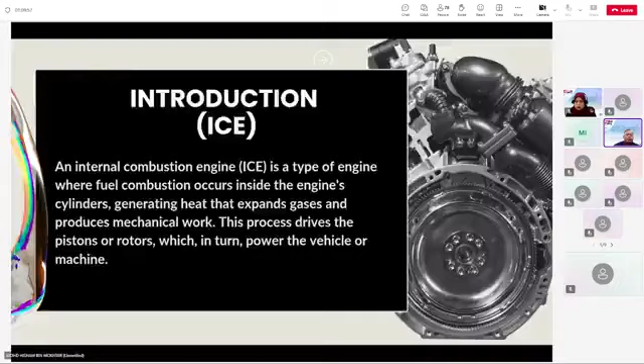What we are looking at today, as content: first, an introduction to internal combustion engine. Third, homogeneous charge compression ignition, HCCI. Fourth, reactivity controlled compression ignition, RCCI. Number 5 should be a new engine, ammonia engine. Number 6, hydrogen combustion. Number 7, detonation engine.

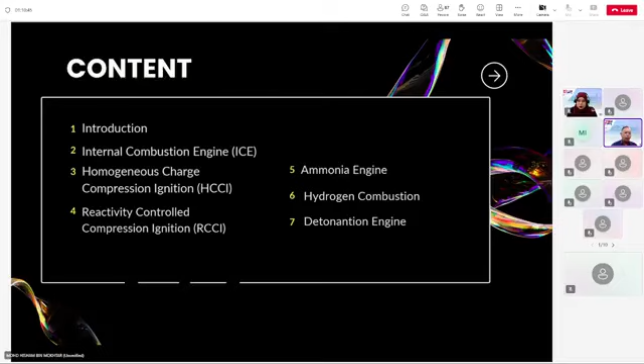I will share some new technology about internal combustion engine today, so perhaps everyone can understand. Maybe the information is good for your knowledge, for all members of technologists.

Internal combustion engine, ICE: fuel is burned inside the engine itself, typically in a chamber called the cylinder. Heat from expanding gases from combustion pushes the piston, which drives a crankshaft to produce mechanical power. ICEs are commonly found in cars, motorcycles, and aircraft.

External combustion engine - today we are not talking about the external combustion engine. Fuel is burned outside the engine and the generated heat is transferred to a working fluid such as water, which powers the engine. For example, the steam engine, where coal is burned to heat water to produce steam, which then drives the piston or turbines.

So the main engine types: gasoline engine uses spark to ignite a mixture of fuel and air. Diesel engine relies on high compression to ignite the fuel without a spark. Later I will explain about the main engine types using gasoline engine and diesel engine.

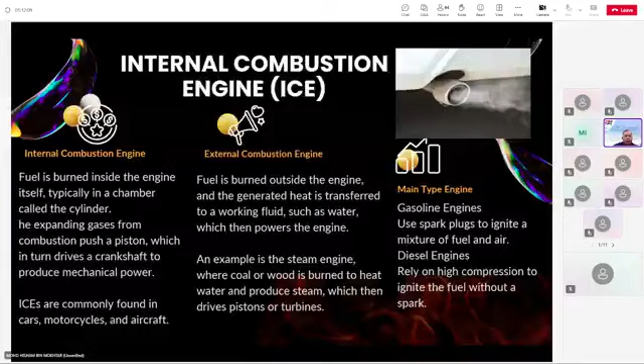Okay, first we are talking about the diesel engine. A diesel engine is a type of internal combustion engine that operates using the heat of compression to ignite the fuel, rather than using a spark plug like a gasoline engine. In the diesel engine, air is compressed to a much higher degree, raising the temperature inside the cylinder. When diesel fuel is injected into the compressed air, it ignites spontaneously, causing a controlled explosion that pushes the piston to generate power.

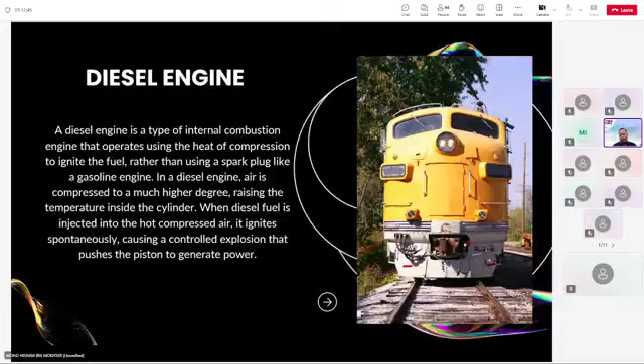Okay. Somebody knows, maybe somebody doesn't know, about why there's no spark plug. It's compression ignition. Diesel engines don't use a spark plug because compression ignition is a type of ignition. In the diesel engine, the fuel is ignited by the heat generated from compressing the air, not by a spark plug. Diesel engines operate at higher compression ratios, around 14:1 to 25:1 compared to gasoline engines, leading to high temperature and pressure.

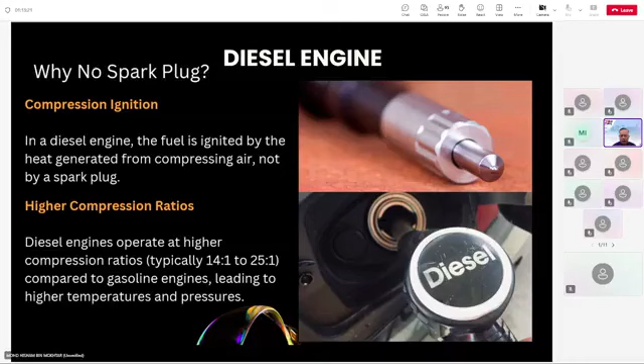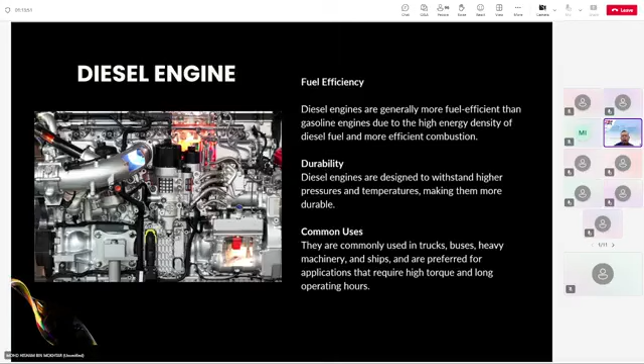Diesel engine fuel efficiency: diesel engines are generally more fuel efficient than gasoline engines due to the high energy density of diesel fuel and more efficient combustion. Durability: diesel engines are designed to withstand high pressure and temperature, making them more durable. Common use: they are commonly used in trucks, buses, heavy machinery, ships, and are preferred for applications that require high torque and long operating hours.

A diesel engine relies on compression ignition rather than a spark plug. The key difference between diesel and gasoline engines is how the air-fuel mixture ignites. In a diesel engine, air is compressed to a much higher pressure than in a gasoline engine, which raises its temperature. When diesel fuel is injected into this hot compressed air, it ignites without the need for a spark plug. Internal combustion engines are used for motorcycles, aircraft, ships, and generators due to their efficiency and versatility. However, they emit greenhouse gases, contributing to environmental concerns, leading to a growing focus on electric and hybrid technologies.

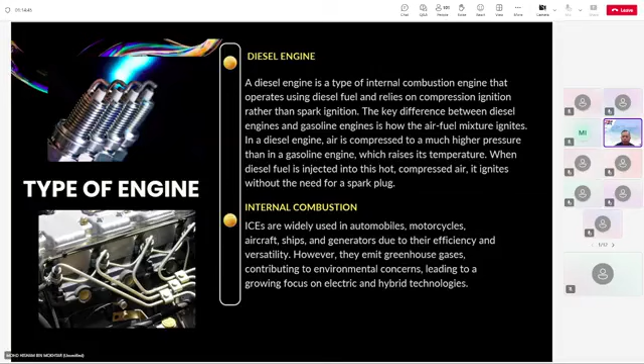Now we're looking at diesel operation. Diesel combustion is known for its high thermal efficiency and torque output, which makes diesel engines ideal for heavy-duty applications like trucks and industrial machinery. However, the process can produce more nitrogen oxide and particulate matter compared to the gasoline engine, requiring additional emission control technologies.

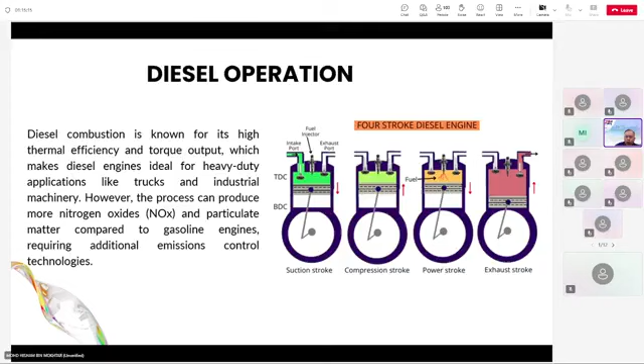This is the process. First is suction: the intake valve opens, the exhaust valve closes, and air is sucked into the cylinder. Second, compression: the inlet valve is closed, the exhaust valve is also closed, air is compressed in the combustion chamber, and diesel is injected. During this, there is high temperature and high compression as the diesel is injected.

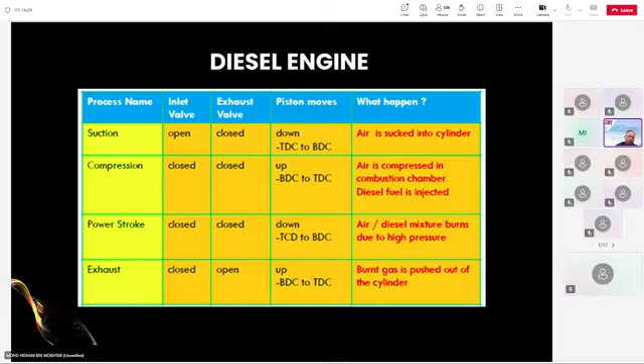Power stroke: the inlet valve is closed, the piston moves, the exhaust valve is closed, and the air-diesel mixture burns due to high pressure. Exhaust: the inlet valve is closed, the exhaust valve is open, and the burnt gas is pushed out of the cylinder. This is the normal sequence for the diesel and gasoline engine.

How about we look at the four-stroke engine operation? The four-stroke is the normal engine we use every day. Intake stroke: the piston moves down, drawing in the air-fuel mixture through the open intake valve. Compression stroke: the piston moves up, compressing the air-fuel mixture to increase its energy potential. Power stroke: the spark plug ignites the compressed mixture, causing an explosion that pushes the piston down and generates power. Exhaust stroke: the piston moves down, then up again, expelling burnt gases through the open exhaust valve. This is the normal sequence.

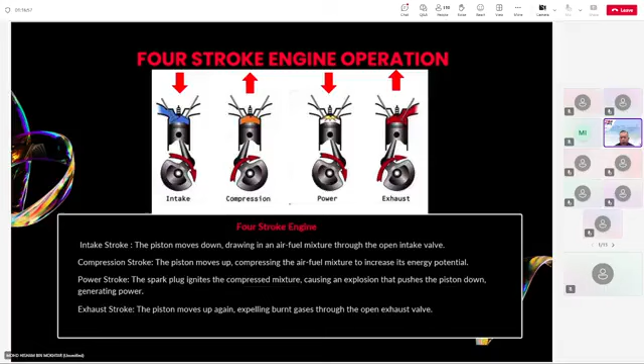How about the two-stroke engine? Two-stroke engines have high power output per displacement, a simpler design, and are better for higher RPMs. They are commonly used in small applications like motorcycles, lawn mowers, and chainsaws.

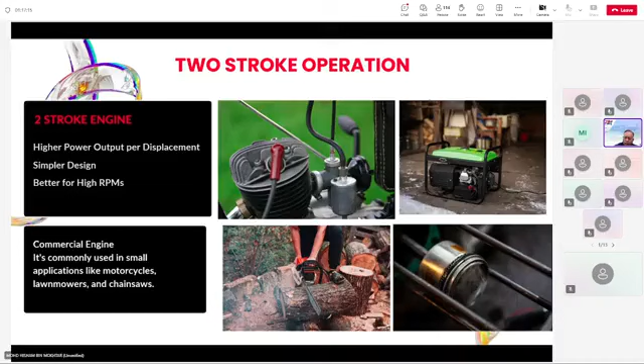For your information, in a two-stroke engine, the intake, compression, combustion, and exhaust processes occur in two movements of the piston. That means compression and power stroke together form the downstroke, which is one process. Then exhaust and intake occur during the upstroke, which is another process. The two-stroke engine is known for being simpler, lighter, and more compact, but is less fuel efficient and produces more emissions compared to the four-stroke engine.

So as we all know, the two-stroke is a small engine used in applications like motorcycles, lawn mowers, and chainsaws.

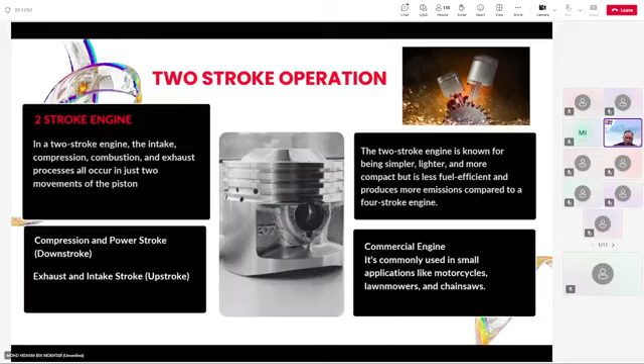Now we are starting on the potential of ICE. The potential of ICE is the new technology called homogeneous charge compression ignition, HCCI. It is an advanced type of internal combustion engine that combines elements of both spark ignition, used in gasoline engines, and compression ignition, used in diesel engines. HCCI engines achieve combustion by compressing a homogeneous air-fuel mixture to the point where it ignites spontaneously due to high pressure and temperature, eliminating the need for a spark plug and direct fuel injection timing for ignition.

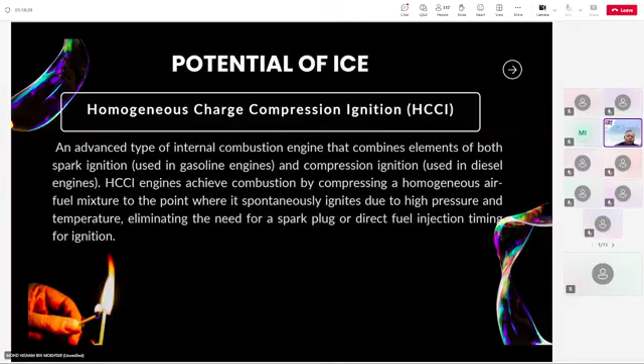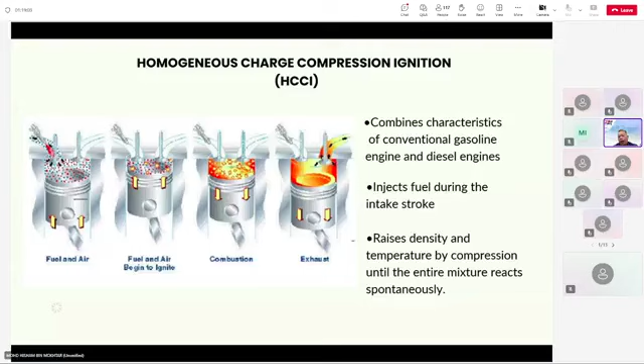This is HCCI. HCCI means homogeneous charge compression ignition. First, it combines characteristics of the conventional gasoline engine and the diesel engine. Fuel is injected during the intake stroke, and compression raises the density and temperature until the entire mixture reacts spontaneously.

For your information, HCCI has gasoline-engine-like emissions combined with diesel-engine-like efficiency, achieving 50 to 60% combustion efficiency. Compression raises density and temperature until the entire mixture reacts spontaneously.

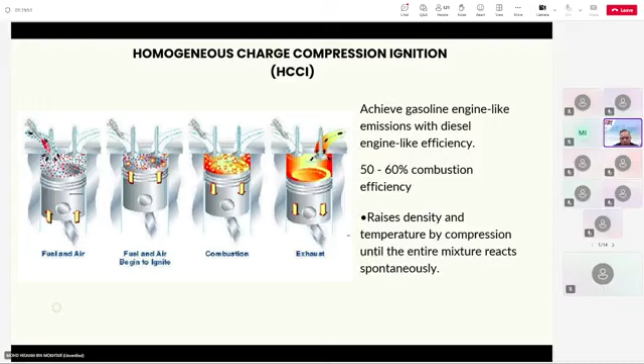For your information, the fuel and air were mixed before entering the combustion chamber. The fuel and air mixture begins to ignite and be compressed. Then combustion happens at the combustion stroke, followed by the exhaust stroke. After that, the exhaust valve will open to let the scavengers out.

Homogeneous Charge Compression Ignition, HCCI, has some weaknesses. Auto ignition is difficult to control, it has a small torque range, and is constrained at low loads due to lean flammability limits, and high loads are restricted by in-cylinder pressure, giving a small range of stable combustion. Because HCCI is still under development, there are weaknesses that need to be overcome to get better results for this engine.

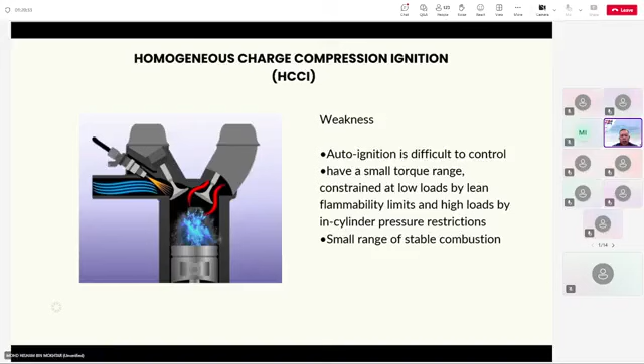Several countries and leading automotive companies are actively researching and developing the HCCI engine to improve efficiency and reduce emissions, such as USA, Japan, Sweden, South Korea, and China.

Now we are changing to RCCI, Reactivity Controlled Compression Ignition. It is an advanced combustion technology that aims to combine the benefits of traditional diesel engine efficiency and gasoline engine low emission. RCCI is a dual fuel combustion concept that strategically controls the reactivity of different fuels to achieve superior performance and cleaner combustion.

This is quite special. In RCCI, there are two types of injectors, PFI and DI. PFI means low reactivity fuel, DI means high reactivity fuel. This requires two different fuels - you must remember the cylinder requires two different fuels.

Low reactivity fuel gets injected into the intake port with low pressure during the intake stroke. High reactivity fuel is injected into the cylinder with high pressure near the end of the compression stroke. The whole fuel charge is ignited near top dead center of the piston by injecting the high reactivity fuel.

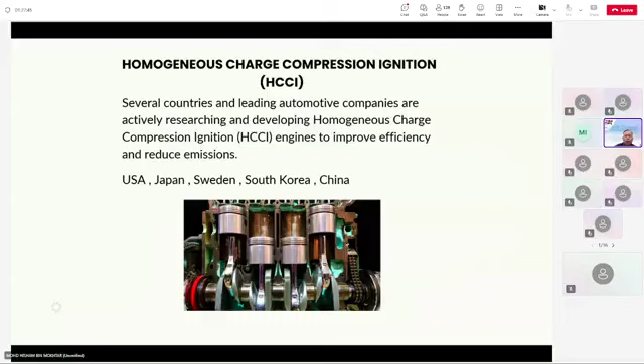Before we go to the RDE, we go back to RCCI first. I come back for RCCI because there is some process that I can explain right now. It's the advanced combustion technology aimed to combine the benefits of traditional diesel efficiency with low emission.

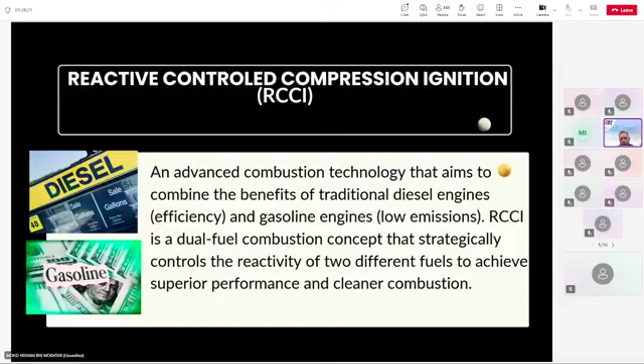RCCI is a dual fuel combustion concept that strategically controls the reactivity of two different fuels to achieve superior performance and clean combustion. That means this combustion, this explosion process needs two types of fuel. First, PFI, low fuel reactivity fuel, that requires two different fuels.

During the combustion engine, the PFI will be injected through the intake port. Then high reactivity fuel stands by to ignite, to spray during the high compression.

Low reactivity fuel gets injected into the intake port with low pressure during the intake stroke. High reactivity fuel gets injected into the cylinder with high pressure at the end of the compression stroke.

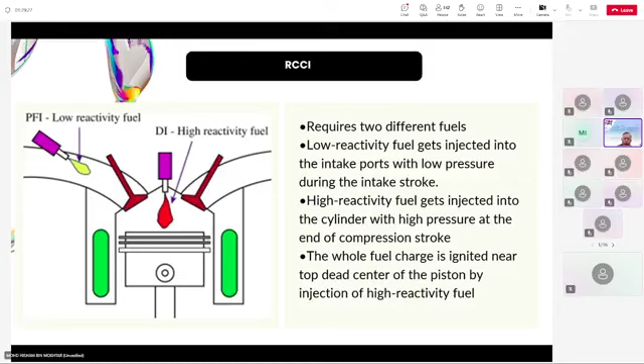That means both different fuels are used to get the explosion and the combustion. The whole fuel charge ignites near top dead center of the piston by injecting the high reactivity fuel. During high reactivity injection, the fuel is like diesel, and the PFI is usually for the gasoline engine.

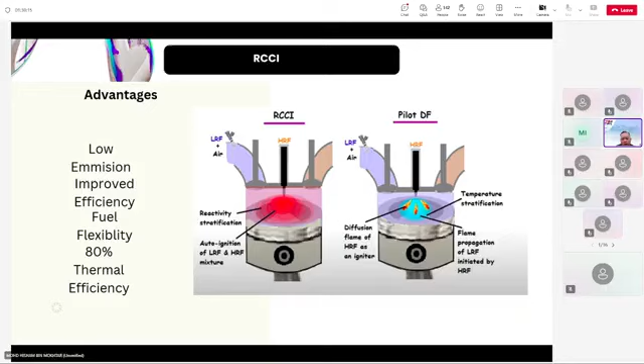That's because it's the reactive HCCI. So it's low emission, improved efficiency, fuel flexibility, 80% thermal efficiency. It's a quite unique and new design of engine.

Advantages of RCCI: low emission, reduce NOx, CO2 and soot, better combustion process control, reduced incomplete combustion, improved efficiency, and fuel flexibility.

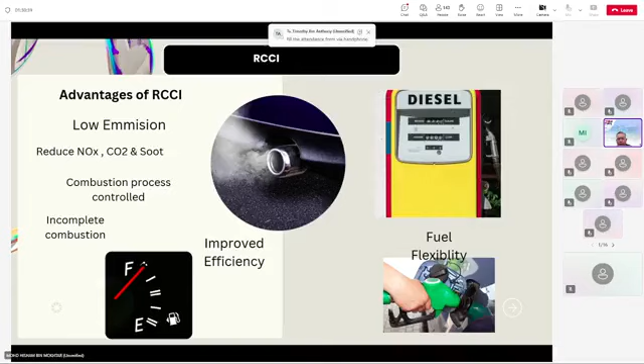As we all know, countries like the United States, Japan, and Germany, along with leading compression engine manufacturers, are actively researching RCCI technology, collaborating with universities and research labs, aiming to overcome challenges such as fuel supply systems and engine adaptability for widespread use.

So the RCCI engine represents a major innovation in internal combustion engine design, aligning with global efforts to reduce environmental impact while maintaining performance and reliability.

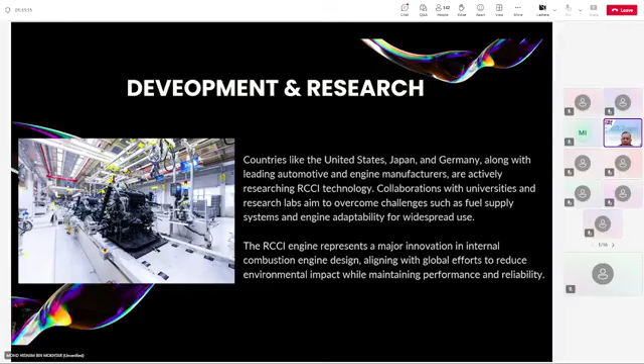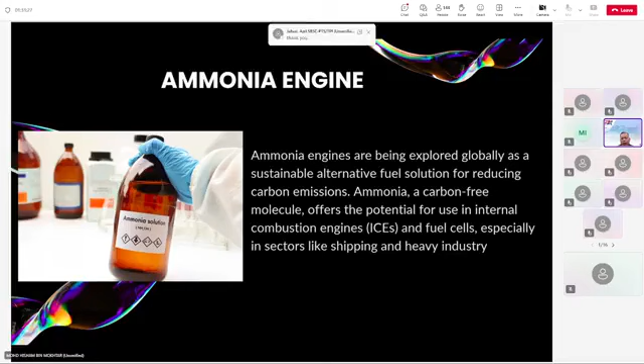Okay, just now we explained about the ammonia engine. The fuel will be changed to ammonia. The ammonia engine is carbon free. As a fuel, ammonia produces no direct carbon emission.

Energy density is higher than hydrogen, and its liquid form makes it easier to store and transport, produce and transport. Existing ammonia production and distribution networks can be adapted for energy use. It's cost effective, potentially cheaper than hydrogen as a green fuel depending on the production method.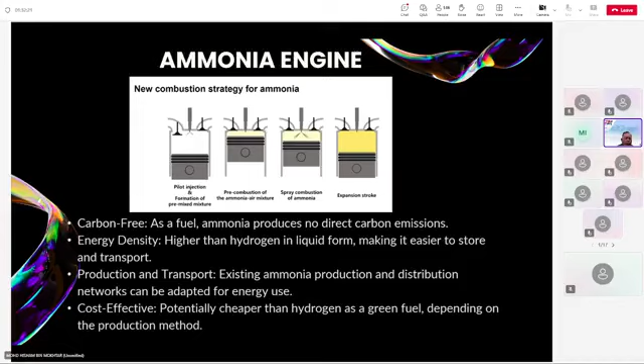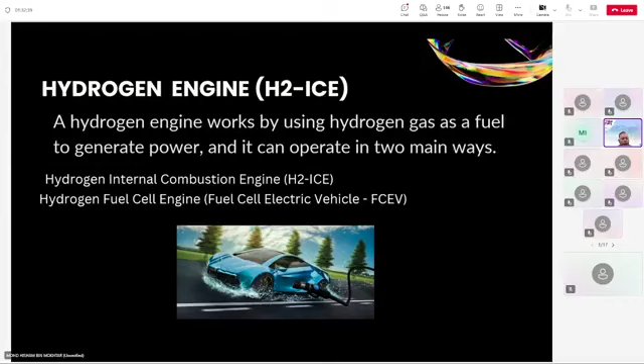So next is the hydrogen engine, which I may have explained already. The hydrogen engine works by using hydrogen gas as fuel to generate power. It can operate in two main ways: hydrogen internal combustion engine, and hydrogen fuel cell engine, fuel cell electric vehicle.

So for the hydrogen engine, hydrogen exhausted through the engine emits water vapor, and its primary emission makes it environmentally very friendly, because there is no emission since the combustion is very clean.

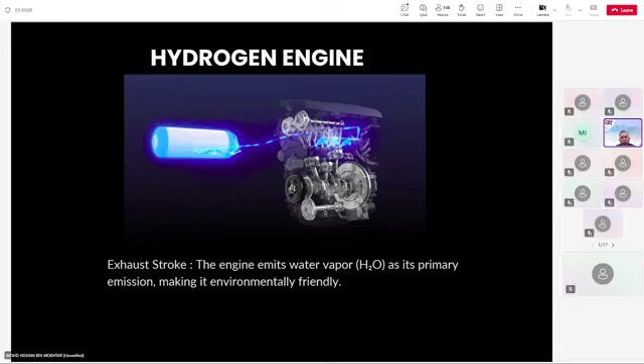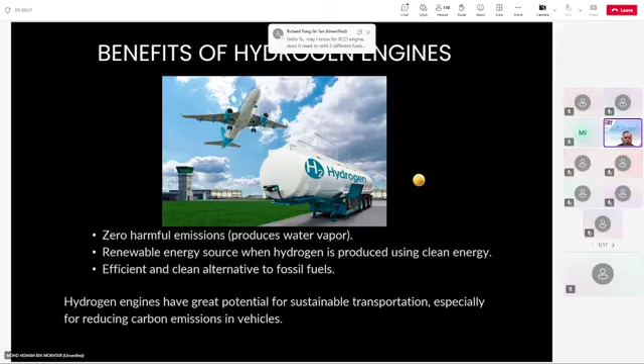So the benefits: zero harmful emission, produces water vapor, renewable energy source where hydrogen is produced using clean energy, efficient and clean alternative to fossil fuels. Hydrogen engines have great potential for sustainable transportation, especially for reducing carbon emission in vehicles.

So for the last one, this is the rotating detonation engine, or RDE. This engine works by using a detonating wave supersonic combustion process to produce thrust or mechanical power. Unlike conventional engines, which rely on deflagration...

...subsonic combustion, detonation engines use shock waves and high pressure combustion to achieve higher efficiency and performance. This type of engine is very fast, and the explosion is quite higher than commercial use. It's usually used for aircraft and for military.

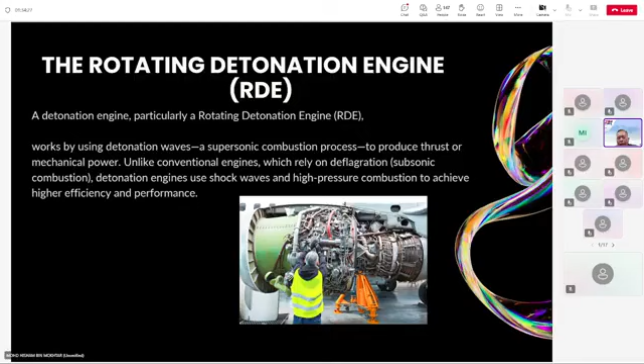Detonation engines utilize supersonic combustion waves to compress and ignite the fuel-air mixture, resulting in rapid and efficient energy release. In the rotating detonation engine, a continuous detonation wave in the circular chamber provides thrust and rotational energy.

In terms of efficiency, it achieves higher thermal efficiency than conventional deflagration engines, reducing fuel consumption. RDE is used for aircraft and military applications because of its very high compression, very fast combustion, and higher thermal efficiency compared to commercial use engines.

Thank you for the question. Ammonia gas, as we know, is quite dangerous for humans, but maybe there's some development or research being done to reduce that danger for human exposure. I also don't have much idea about that because ammonia engines are very new - I only saw this ammonia engine a few months ago. I'm trying to study it, because ammonia is quite difficult to get for mass production use. So I hope in the future there will be new innovation in producing safer ammonia. Thank you.

Okay TS, I think this is the last question for you. Hi TS, how can we detect the piston got problem before it was jammed in the liner and cause explosion to happen?

This is for the ICE, correct? Can you repeat one more time the question? Can we detect the piston got problem before it was jammed in the liner and cause explosion to happen?

Sure, thank you for the question. For the piston having some problem, firstly, this is my opinion - the pressure becomes too low. Sometimes for the full stroke, the pressure is too low, and this can produce white smoke or black smoke after combustion is not completed correctly on the combustion stroke. Before that, there will happen some incomplete process, known as blow-by loss, because when the piston gets scratched or something else happens, pressure is too low, and smoke - white or black - will come out, showing the car owner that the engine has a problem now.